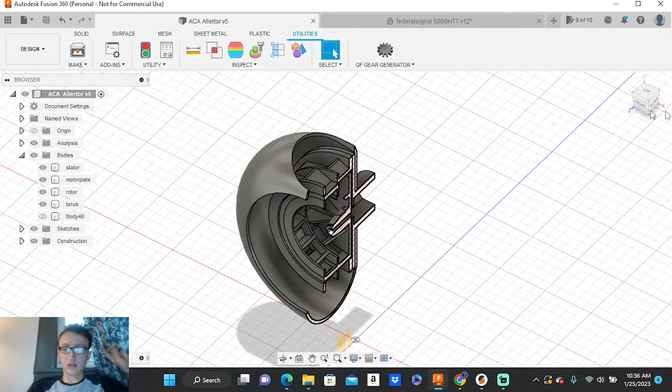I wanted to talk about a little bit of the stuff we'll be doing today, and this is going to be my first introduction into the first ACA siren I've actually ever worked on. I wanted to jump in with something a bit more interesting in ACA's lineup, starting with one of the classic ones, really the first siren that defined ACA, or in this case Biersack and Niedermeyer, one of the defining sirens that really made that company.

So, of course, we're doing a classic one here, working on an Allertor. This specifically is going to be an Allertor 125, one of the ones that has the elongated horn, not so much the cheaper versions where the horn is a lot more shortened.

But kind of like the mid-generation ACA, one of the mid-generation Allertors. This, of course, is going to be 912. I know there's a lot of different port combinations you could get with the Allertor, but I like a 912. I like the way 912 sounds.

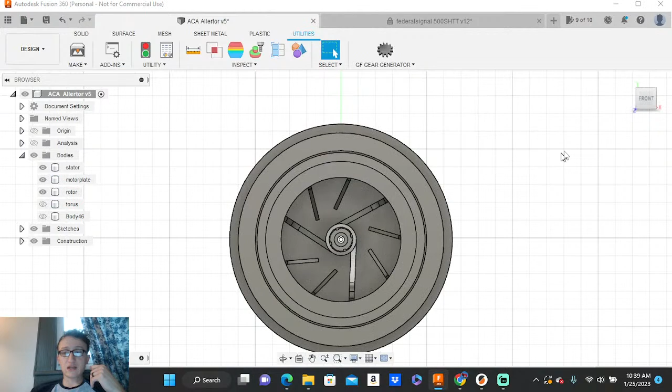Also another thing that I really liked about doing some of the designing and the stuff is the ACA rotors. The ACA rotors and stators are, let me tell you, I consider myself a Federal fan.

I like pretty much all of Federal's stuff, spanning from Federal Electric all the way up into modern Federal Signal stuff. But man, some of the really early Federal rotors are really lazy. I mean, of course, we can take a look here. This is, of course, a 912 rotor for a 500, and it is just a really simple rotor.

It is really simple, and I know kind of what they were going for with this design, trying to make the rotor unidirectional so it doesn't matter if it's reverse wired. I know that was one of the big things with them. But in doing that, you really sacrificed a lot.

Sacrificed a lot, because it's just not a very efficient rotor design. It's horrible. And of course there's a big stigma about dual tone sirens, that they're usually nowhere near as loud as single tone sirens, which is true. I think a lot of that mentality is coming from the effect of Federal design rotors, or Federal Signal's dual tone sirens.

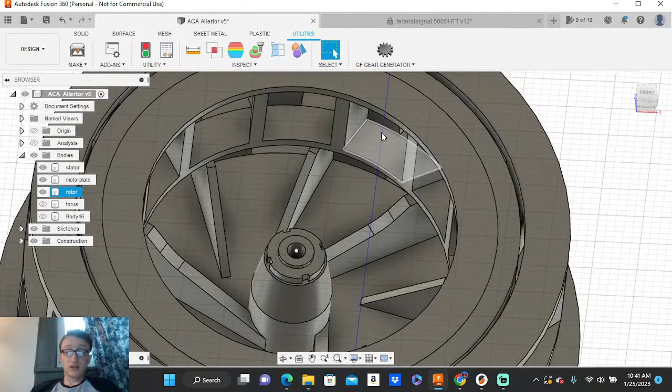Hats off to ACA, or BNN specifically I guess if you want to get more pedantic about it, who really designed the rotor. But it is just a fantastic design. It's super simple, but it is a directional rotor, so you can get some inherent efficiency gains by making it directional. And with all these swept vanes, it drastically increases the efficiency with a lot less drag on the rotor itself. And then having the knife edge sharpened ports is just...

I'm kind of nerding out about it just because of how well it's designed, because I've actually printed this rotor. I've printed both of these. So let me go ahead and go to Streamlabs really quickly again and make my stuff really big.

Let me read some of the chat. Mini Siren says, I made a video. Oh cool, I'll have to take a look at it. CNY Siren Boy says he's waiting for his SD10 and 2 poles, that should be okay. Oh, you're CNY Siren Boy, okay, I recognized the location when I was shipping them out. You should be getting it sometime this week since I shipped them Monday. Silent 65 Gaming says this is their favorite siren I'm creating currently. Awesome, yeah it's a pretty cool one, a classic. Someone asked to see the fully completed and working Songs Model 120. I have, you've probably seen the video I did, it's a bit further back in my channel, but that's at least the prototype. Eden actually has my prototype right now, it was too big to bring to South Carolina, but if you want to see it I can show you the model on Fusion. Model L says nice.

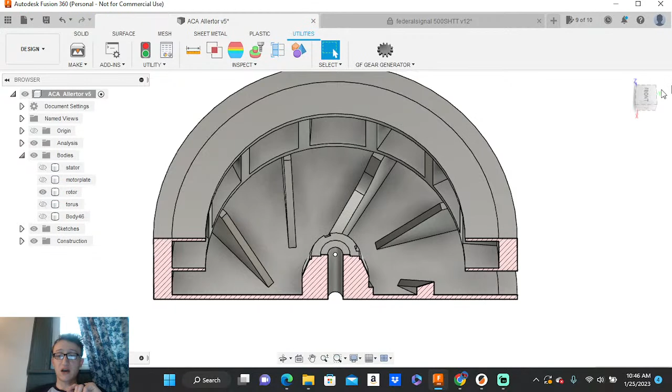I don't know how well you can see this in the background, but the fin that reaches all the way into the center and touches the hub, on the real one has a bit of a sweep to it as it goes up, flaring out towards the edge of the rotor. Trying to make that was more of a hassle than I expected. But other than that, this was really not that hard to model, so that's why I'm not going over it, since this is the stuff that really consumes a lot of time.

And the stator is much of the same thing, really not that difficult either. So there's that, but let's get on to some of the other stuff. We're going to assemble all of this. I've already gone ahead and made the rough general shape of what we're going towards for the Allertor.

There's a couple of engineering concerns here about how this is really going to work, because remember, this is going to be 3D printed, and 3D printing has its limitations on what it can do, and what it can do well, I should say. One of those things is 3D printing is typically pretty bad about making these rounded-over, spherical or spheroid kind of shapes.

In this case, it's a torus that I basically made as a toroid, then made another toroid inside that to cut it out and make this hollow donut shape. You could do that in Fusion, I'll probably explain that in some other video. But the printer has a very, very hard time trying to model this kind of rounded-over shape.

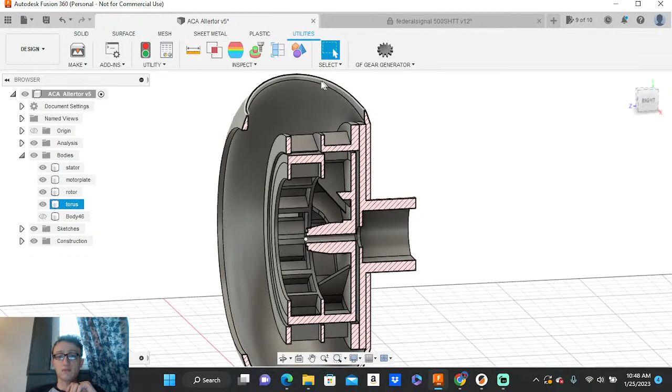It also has an even harder time trying to make this little circular cutout on the top, cut out right here, because consider this: the printer is essentially going to be printing this whole thing like this. So the bottom of the print bed is going to be right here, and it has to try to print this really slight overhang almost the whole way up, and then do it again at the top, all while trying to make this as circular as possible.

It just really can't do it, not with the kind of layer heights you have. So here's that same exact piece actually in Prusa, in the slicing program I use, and you can see these kind of printing artifacts right here.

Ooh, I'm flipping all over the place. You can see what I'm talking about right there, with this printing artifact right here, which doesn't look that bad on the slicing program, but trust me, once it's actually printed, this whole little shape really gets amplified by the real world inefficiency, or the real world looseness of the printer, the run out, one could say, because the printer is not going to print super precise. It can get pretty good, but that's about the limitations of what it can do.

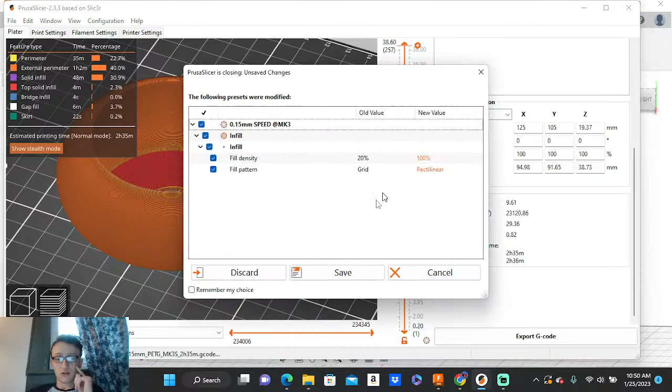Now, I did kind of negate one other thing that is kind of crucial for the Allertor 125. Yes, discard that.

So that's one thing to kind of consider. Now, on my version so far, I didn't do that, so this is not cut out like that. So this is probably going to be more akin to one of the later Allertors, which I didn't really want to go for. But I'm already printing the piece out, so there's kind of no point in going back. So this would actually be a bit more accurate to... what the heck is that?

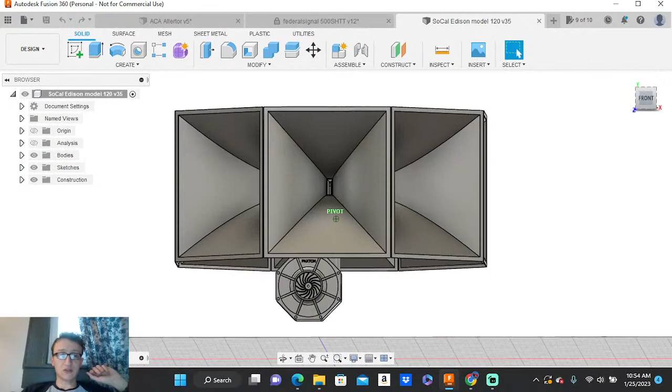But anyway, Adam Sturgeon was curious about the 120, so we'll go ahead and show that off really quick, because I never did get a chance to actually cut away at it. So we'll go ahead and open up the 120 right now. This is just the prototype version of it, kind of left in limbo, as I never actually finished it. I didn't build the frame around it or anything like that. But this is the 120 - this is what that design was based off of.

So everything is here, I think I've got multiple analysis points, actually. Okay, so that's a split view of it - that's our first split view. So this is, of course, all the horns, there's the waveguides right here, which I think I can actually probably isolate.

Oh, this is one of my old models where I didn't label anything. I was so horrible back then.

But for those who wanted to see a cutaway, a top split cutaway of it, to show what's going on - here we're looking down one of the throats of the horns. As you come down, you reach where the fiberglass horns meet the cast aluminum waveguides that come off the stator. This is what that profile looks like.

Right here is what I would consider a resonance trap. This inclined profile is there to prevent the sound wave, as it travels down the throat of the horn and the waveguide, from sitting here and bouncing back and forth, because this small profile is pretty parallel to itself - it's not yet in that horn profile shape.

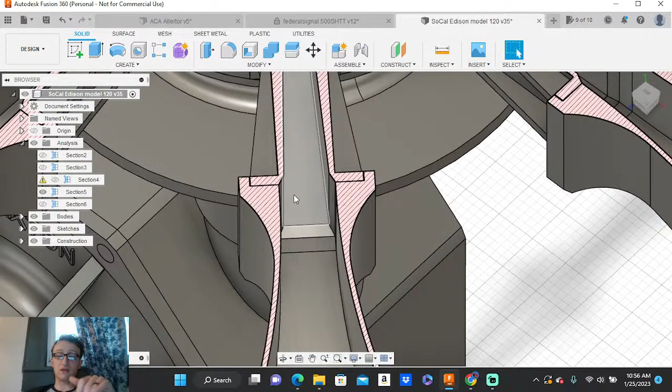So it runs a risk of some of the sound feeding back into the actual rotor and stator itself, which cuts down on efficiency. By putting this here, you're essentially convincing the sound to move more out towards the horn direction, and it doesn't allow the sound to travel back up the waveguide. That's what that weird profile is for - it's a resonance trap.

And then as we go inside, this is where we're getting to the walls of the stator. If I was to come in here and remove one of these waveguides - so this is this waveguide - there's the walls of the stator itself as we get closer up into it.

And right here, this is the rotor. You can see how it would spin around - let me rotate this really quick. Yeah, there's the rotor, rotating around this axis. This is a 4-port rotor, which is somewhat inaccurate - it would have actually been a 5-port for the final versions. But this is the 4-port rotor I've got just spinning around here.

If I had the 5-port rotor, this would make more sense. I had mentioned in a comment about an asymmetrical port ratio, where the rotor has either fewer or an odd number of ports relative to the stator, and how that can affect the tone created by the siren.

It's usually always going to be stator dominant - so if it's an 8-port stator, it's going to sound generally like an 8-port. But one of the reasons why the San Onofre nuclear generating station siren has such an interesting tone is because it actually somewhat acts like a tritone siren, where it acts like it has 3 tones.

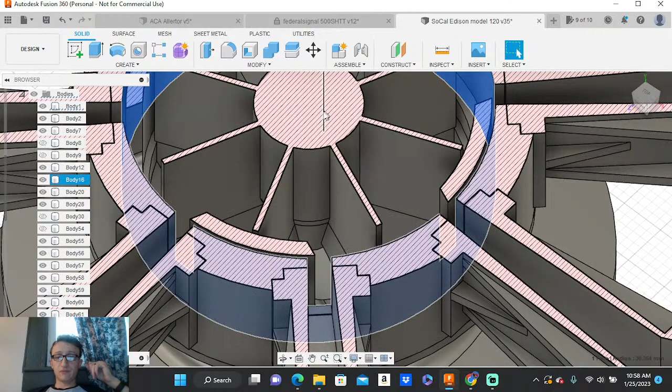But then on the inside, past that stator, past the rotor, there's actually this deflector that's in there. Let's see if I can get a better view of it. This deflector is - oh, that's a cutaway of the blower, I don't want to see that. Let me see a cutaway of the - come on, damn it, hold on, give me one sec.

Let me do a different section analysis really quick. There we go, that's pretty good.

So as I was saying, here's a bit of a different view. If you can follow along with me, I'll explain some of the oddities of it. Here's the outside, the stator right here. Of course we have the rotor, it spins on the inside, and then this is that deflector I was talking about - deflector, diffuser, whatever you want to call it.

I'd consider it more of a deflector because, if you look at the air path, it's taking air directly from the blower. Air gets pulled in here, flung out by this impeller, gets pumped up this pipe into another resonance trap, which is there to prevent the intake noise of the rotor from traveling back down into the blower and being heard out the front. It would also cause vibration issues if a really low frequency gets fed back into the blower - which is another reason why this thing has that specific shape.

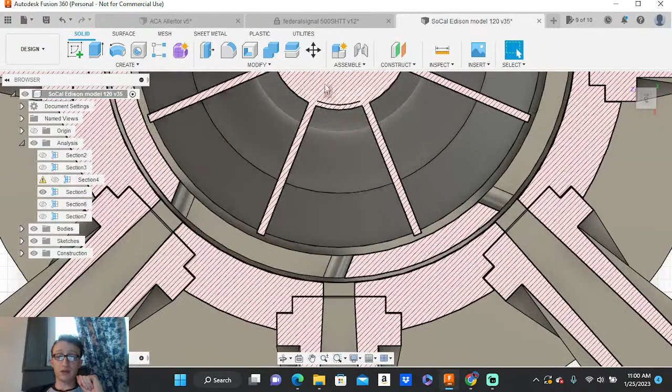You can see how there's actually walls to it. So there's walls on either side, basically to separate each port. You can see that here's the port right here, and there's a wall on this side and a wall on this side. So the only way for the air to travel out is the air is pressurized in this area.

of this diffuser, and as this port rotates around, and this rotor rotates around and uncovers this port, all of that pressure that's built up in here can then be forced out.

But the reason why I said that this is more of a tritone siren is because you've got 8 ports out here, and these walls chop the air as well.

As this rotor is spinning around, you can see that it's uncovering this little section right here of the wall, allowing some of the air to actually bleed from this edge around the port and into this side, and vice versa. So this basically, the air is being chopped against here, and then it's being chopped against the actual port.

So it's more like having an 8-port, a 16-port, and a 5-port because of just the way that the siren is set up, because of all of the stuff that's inside the siren. You're not talking about just the ports that are on the rotor and the ports that are on the stator, because there's basically this diffuser in the center.

So that's mainly one of the reasons why the 120 has such a very, very odd kind of tone to it, is because it sounds like a 16-port, and if you hear in the video of the prototype, you can actually hear that like 16-port kind of whine it has to it, where it's really high pitched.

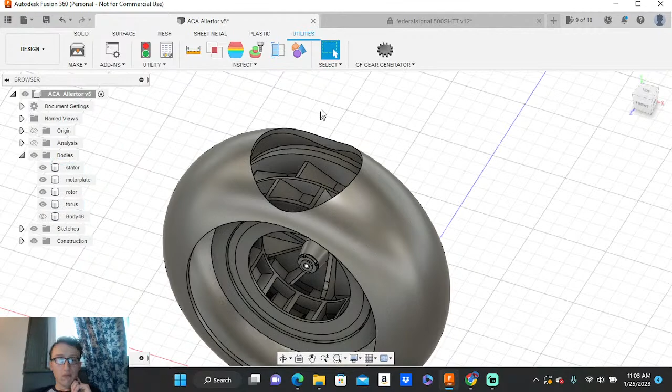But let's see if we can model kind of like the front projector, like the first little horn that's kind of on there, this one right here. The intake projector. Let's see if we can kind of do some of that.

So I'm going to start off by first coming in here, doing an offset plane really quick, and just kind of filling in this gigantic front space, because we do not need to have all of this hole right here.

So let's go up. What size is that? It's like 11? No. 12? Wow, these cop cars are really, really fantastic to listen to all day.

Let's do about 11 point... Oh, no. Oh, gotta ease it on up close to it. Let's see, does that get us close enough? Maybe not. That looks pretty good. Alright, so we'll do that to kind of close this in a little bit.

So we're going to put the offset plane there. I think the way that, just for ease of printing, I'm going to leave this part generally open on the front, but I'm going to make this part that's going to close it up basically be a separate piece.

So let's go in here. I'm not going to go... Oh, that's not centered. I'm not going to make this go all the way to the other edge.

Let me make sure I get rid of all that stuff, because I kind of want to have a little bit of space for expansion here.

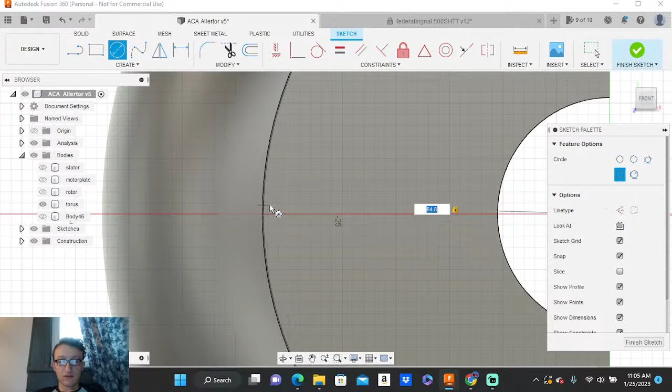So how big is that? That's about probably 35, maybe 60 - oh, that's pretty big. 65 probably, yeah about 65. So instead of doing 65, which would bring us right to that one edge, I'm probably going to go about 64.8, which gives us about 0.2 millimeters of tolerance, which is generally about how tight I make my tolerance on my sirens anyway. So let's go ahead and do that.

And we'll just kind of fill in this little space, just to essentially blank off the front of the Allertor itself.

What is my cat doing? Spice! Sorry, my cats are messing around.

So let's kind of bring this up a little bit, a little closer, there we go. So about 1.56-ish, that's close. She just sneezed - I don't know if you're able to hear my cat or not. But let's go ahead and kind of bring that out a little bit.

So we're going to make this a new body. We don't want this thing associated with this whole donut shape. So now we essentially have like a sealed little Allertor donut face thing. This hole in the back, of course, is to basically allow the entire stator section to pop through the back of the siren. So essentially this whole thing will be printed as one big piece, which you've seen in the intro of the video where I was showing off the Prusa slicing program I use. That's where that was.

Hold on, let me get this video light charged because it's getting darker outside. We're in the middle of a thunderstorm right now - no thunder yet, but a thunderstorm.

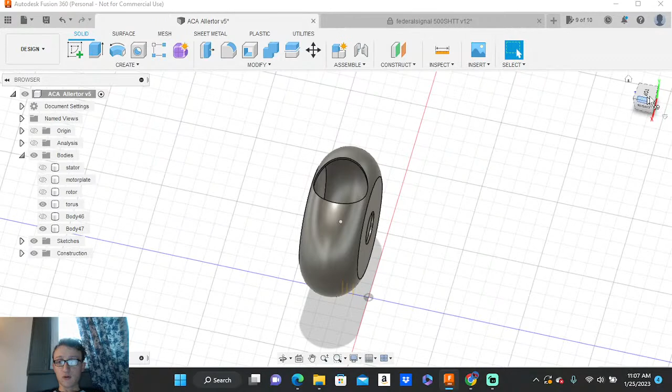So now that I can generally see kind of where we're at shape-wise, let me look at their reference image really quick. Man, yeah, I'm gonna have to make that cut out. So I printed this piece for nothing because I'm gonna have to get rid of it. It'll basically be scrap.

What in the hell is going on in this? Wendy's? Okay, y'all in the community are wild, and man, that is some wacky stuff. A Wendy's Thunderbolt 1003.

Okay, let me see, there we go. That's a really, really crisp reference image. Whoever posted this to the Air Raid Sirens wiki, that's a fantastic picture of the Thunderbolt - hats off to you, there's a great picture of it. My gosh, you can almost reach out and touch it.

Okay, so let's go with this image as our reference image. So this horn I can see from the edges of the actual torus, the toroid - this horn is about the same size. So we're going to use that as our justification here.

So first let's cut out the shape right here. Let's first cut out the hole for the intake, for obvious reasons, because we need to be able to get air into the siren. I think the center of this is about 35 millimeters, something like that. Let's do 35 and see where it gets us. So let's cut out the center hole really quick. Oh perfect, oh sweet, okay that's fantastic.

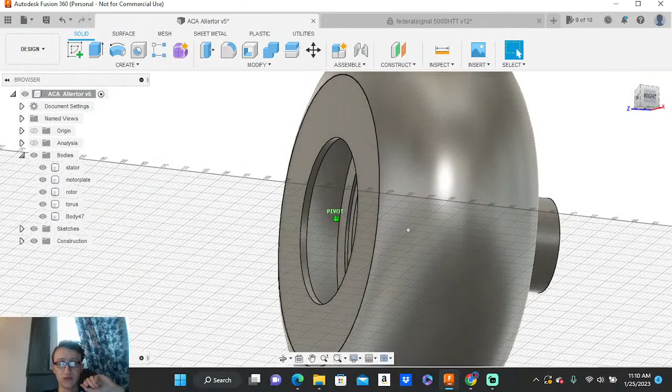So now we can kind of move on and see how we're going to make this horn actually fit in there. And this is going to be one of the fun parts, where we're going to be using the form tool, which I don't think many people have seen.

We're going to be using the form tool to create that swept horn shape. Alternatively, you can use lofts. Lofts are usually the way I do things when making horn shapes, but everyone's different. I guess we'll start with the loft tool and see where we end up. If we like that, great; if not, we can switch to the form tool and make our own custom horn shape.

So let's go ahead and name this the intake plate, just like that, and we will try to create this.

I'm going to go with the loft tool for some of this stuff. If you've seen my previous how-tos on Fusion, you've seen the loft tool used quite a bit. It's one of my favorite shortcuts for making stuff. We're going to use it here, see how it works, and go from there.

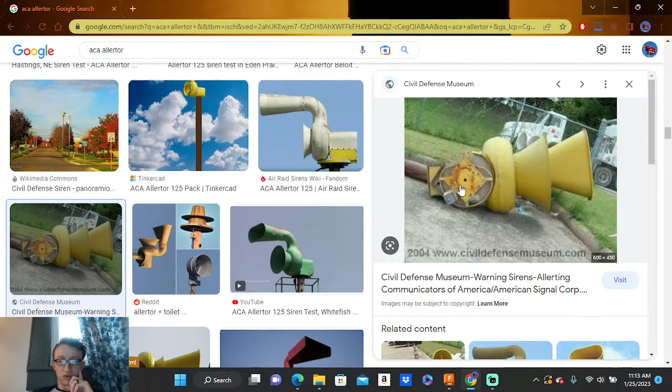2nd gen has a circular rotator and 3rd gen has a teardrop rotator. Okay, so that probably means... I mean, they all kind of have a teardrop rotator, don't they? Because they're all chain driven and the little sprocket always comes out the back. This is one of the weird ones. Yeah, that's the round rotator you're talking about.

I'm probably not going to try to make this one, because it's just so ugly looking in my opinion. I don't like the stubby little horn on the intake, and I don't like the way it leans back on the rotator. I don't know, so I'm gonna be making that one, the first one I showed you, wherever I put it now, it's a really good profile. I'm basically going to try to make this one that you see right here.

Whichever generation that one is, again, because I'm not entirely sure, which is kind of embarrassing that I don't know. I don't really mess around with ACA stuff too much, which is why I'm thoroughly impressed with how well this thing sounds so far. So whatever generation this one is.

Silent 65 Gaming, yeah, I don't like that one. The intake is weird, yeah, I don't know, it's really ugly and stubby. So this is kind of what I'm going to. Yeah, pretty sure that's Gen 2, that's what I thought, I'm pretty sure this is Gen 2.

I know the Gen 1s are more akin to the B&N, the Mobil Directos. I mean, B&N, ACA, it's the same company really, but you know what I mean. So I'm pretty certain the more of the B&N, that's pretty much like the first gen Allertors, but anyway, this is kind of what I'm going for, for anyone watching this later once the stream is up on YouTube.

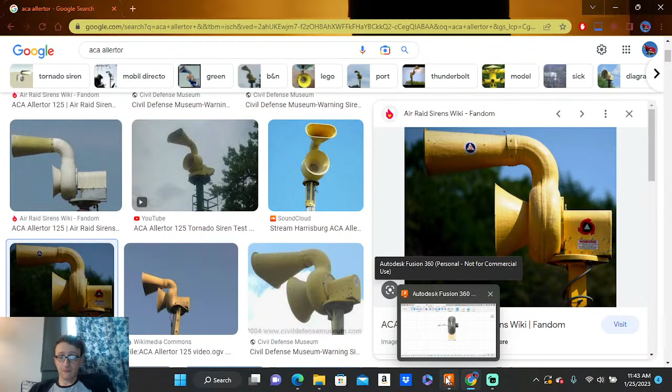40 looks pretty good, so we're going to do about 40 millimeters, because I don't want to make it stubby like this ugly thing. So we're going to go with this - this is where having these pictures side by side gets really convenient, because I can just do this. There it is, shrink that down. Oh, you bastard, I want to see the picture - let me zoom in the picture. No, I don't want to Google search it. Thank you.

Okay, well I could have gone here. This is the one that's got all the... I really don't like using the Air Raid Siren Wiki, because the information on here isn't always clear.

Okay, so the one I'm designing right now is going to be a Type 3, the later version. The Type 2s are just so ugly, and there's a Type 1. So we're going to go with the Type 3, the later version, because I personally think the last generation of the Allertors just looks the best, so we'll go off of that.

So I wish I could get that picture bigger. Wow, that's perfect. That is perfect. Okay, so now we can get this a bit more accurate here. Let's see if I can move this. Can I move you over a little? Thank you.

Okay, so we're going to kind of eyeball it a little bit here, try to get the shape to look just right. I'm probably going to go about 45. 45 looks a bit better, being just a bit more elongated.

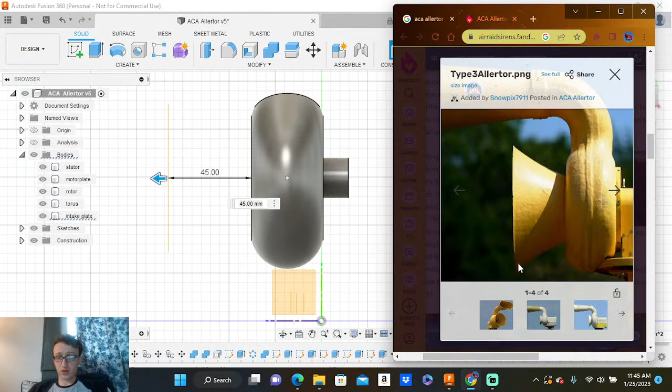And on this generation, the third generation, it looks like the actual edge of the projector is slightly larger than that of the toroid itself. So we'll have to keep that in mind. If this is going to be, I know this toroid is about 100 millimeters in diameter.

So let's go ahead and make this other circle over here. Leave that construction plane, that's a perfect place to put that. That's a bit of a... I don't know why I fumbled over those words. Let's go ahead and make this...

Horn. So we're going to come here, find the center of this circle. So this should be about 100. I guess it's 95, I was close. 95 millimeters is the diameter of that toroid.

So we're going to go out just a little bit more. The projector is slightly larger than the toroid, so we're going to go maybe about 100 millimeters, maybe 105, and just see how that looks. That's about right there. Let's see how that looks relative to the...

Yeah, that kind of makes sense, because the center hole, the intake hole of the horn, is kind of small. So let's do that. That looks pretty good. I like that. Yeah, I like that design a little bit. We're going to go with that.

Shrink that, make that go away again. Thank you, no, I don't want... No! Thank you. Fusion can fight me sometimes. I'm just a little rusty, it's been a while since I've actually gone back and made a new design, so just bear in mind, that's probably why I'm a little frazzled when it comes to getting stuff designed.

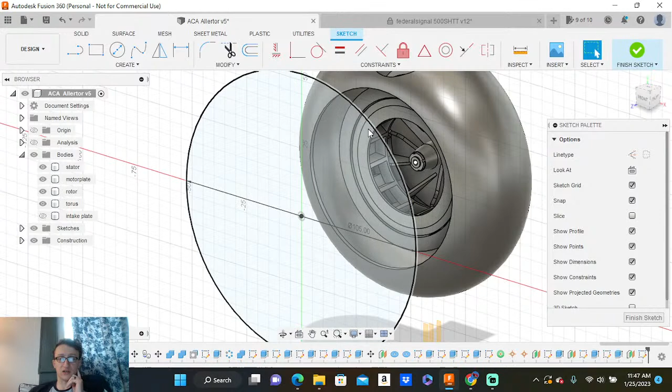Like, for example, the Model 7s are all printed in bulk. I try to print them in bulk at least, still part by part, but I can print the parts in bulk.

So let's go ahead and think of something we can do here. I might actually put another construction plane right there. I want to finish that sketch. That sketch is fine, leave that there. Let's put another construction plane right... why not, right there, let's do it right there.

Let me make this one invisible, make this one go away please. Which one is it, is it this bottom one? No, no it's not, I just placed that one. Center point, center point, center point. Oh, it's not a plane, it's a sketch, it's a sketch. Idiot.

There we go, let's make that go away so I can see what I'm doing. Okay, so we'll go ahead and go here.

I'm going to make this circle about the same diameter as the rotor itself. About 40-ish millimeters looks pretty good. Let's do 40 mils, because I know the center of the rotor, this inner edge of the rotor, is like 35. I typically make all of my rotors generally about the same size to keep the scale about the same.

But this is kind of its own new model, so things might be a little skewed. So let's go with 45 - I think that's what I made it. I think it's 45, right? So we've got this one here.

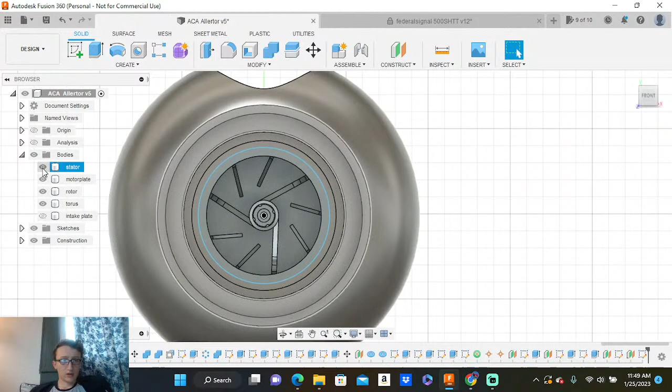Let's get rid of the stator, this motor plate and the rotor and the torus itself, so I have just the sketches. I'm going to bring that other sketch back, which I just got rid of.

This will kind of give us the shape of the horn. Now that I have these two sketches, I'm going to make a loft between the two of them, and do a tangent, or base the whole thing off of takeoff weight. I'm going to connect the two of those, and it's going to make a really goofy kind of looking horn at first that's got no weight to it.

I'm going to define this by direction, and then I can actually change how much this shape kind of sweeps. Let's see what that looks like.

My watch is telling me to move. It's like a reminder to move. I'm like, yeah, I'll look at that. I'll do that in a little bit.

So that's kind of getting there. That's already kind of getting there. That was a lot easier than I thought it was going to be, actually.

So let's go back and actually change this size. I should be able to edit that sketch. Let's change this - so what's the sketch dimension?

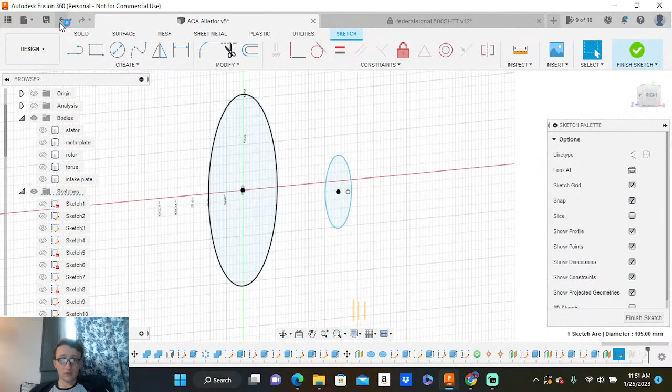So let me go back and actually get rid of that, because it was at the perfect distance. It was at the... what the hell is going on? Excuse me, yeah, it was at the right distance, but I kind of want to change that size. It's a little big.

So we'll go back, make this about 100. We're not going to do 105 - that was way too big, it just didn't look right. So let's do about 100, and we'll finish that sketch there. We'll leave it at 100 instead.

Let's go back in and get rid of this stuff. We'll keep the rotor, but get rid of all the rest. Now I can come back in, do another construction plane, so it'll separate these two, so these parts aren't just kind of glued to each other, which is not really what I want to happen.

So I can get this dimension correct, go into the sketch, and make this outer sketch go away. Okay, go into here - what did I make this? 40, I think is what I did.

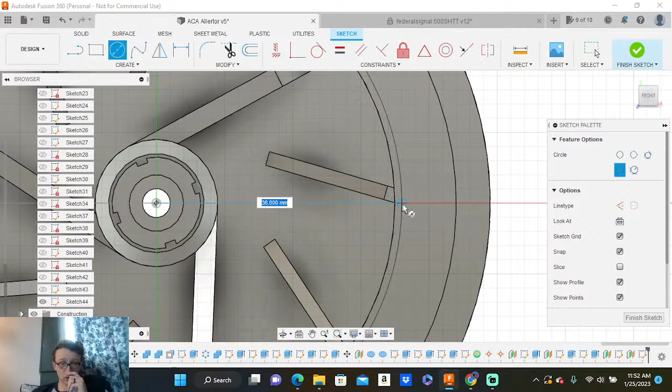About 40 mils. If I do 38, because this whole thing is about 36, I think - yeah, 36 from the inner edge of the rotor. So let's do 30. Screw it, let's do 38.

So I can make the walls of this thing 2 millimeters, like I was saying. Okay, so 38 - make this, and then we can get rid of this rotor, make the rotor go away, and bring back that sketch that I had made for the front of the projector, and we'll do what I had just done before - go back and do this loft tool again.

Between the two of those, we're going to weight the bottom one, and that takeoff weight is a little too much. I want that to be a bit smoother.

This end of this profile you're not actually going to see because it's going to be hidden inside the actual donut, the kind of donut shape. So we're going to leave that, and we're going to kind of cross-check it here by bringing that back and seeing if that looks better.

And I think it does - I think that looks a lot better. That's pretty accurate to the... yeah, I think that's pretty accurate to the right shape. So we're going to call that good.

Now, granted, that is going to bring that all the way to the edge of the rotor, which is not something I particularly wanted to do. So I might actually have to do a cut to get this off of the rotor, because it's a little close for comfort.

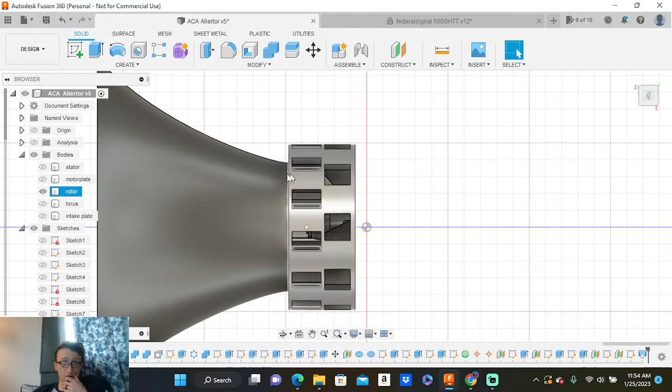So let's get rid of the torus really quick, because you can see that it's right up against that rotor. It's really close. So I'm going to come in here, get rid of this rotor again as well. Oh, you moron. Why did you bind it to the rotor?

Okay, let's try this again. Let me come in here. I'm going to construct a new offset plane off of this sketch.

Let's go in about... 5 mils is a little too much. Let's do about a millimeter. Screw it, let's do 2 millimeters, just to give us enough, a bit of room off of that.

It should match up kind of close with the stator. I want the inner cone to sit up against the stator, like it does in the real one. So let's do about 2 mils in from that.

It's still a little far. Let's do 1. Wow, it's still pretty far. I'm gonna say 1. We're gonna leave it at 1, just to give us a bit more space off of the stator, and definitely a bit more space off of the rotor.

So let's go back and do this sketch again, same dimension as this, so 38. Finish that sketch. Now can I make that sketch go away, the one I don't want anymore, the one behind it? It's that one, right? Yes. No. That one? There we go.

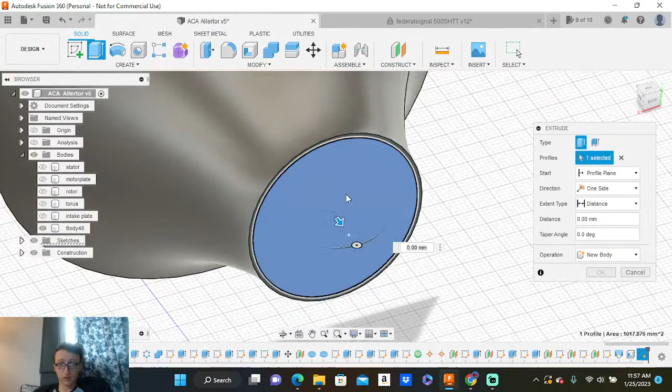Okay, so 38, so we'll do 36, which will give us our proper thickness. Go in here, and that new sketch I just made, we'll use that to cut. We can cut out that to make the horn projector actually have the right profile to it now.

And where is that intake plate? There's the intake plate. So the intake plate kind of cuts in a little bit.

Now if I really wanted to, when I made this profile, I could have actually hit cut and it would have automatically cut this little section out to make these two kind of match. But it ultimately doesn't matter.

So I'm going to go in here and actually sketch off of that, just so I can cut this circle out a bit. So I do need to see where it's actually making contact. Where is it contacting at? About right there, 42, that makes sense.

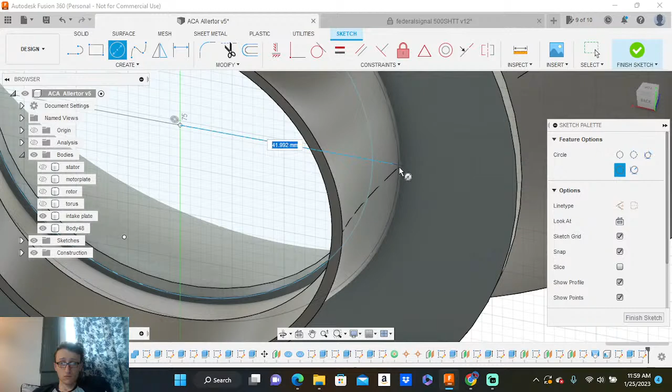The two are contacting. I don't know why it has that funky little shape on it, but we're gonna roll with that. I'm gonna cut it right there, and we're gonna cut this part of the ring out so there shouldn't be any interference with the two of them.

Now how does that look once we actually have that whole thing on there? And that little bit will kind of extend in a little bit, and we'll get really close to the rotor, just like that.

So I think the whole functional part is just about done. Now there is one more thing we have to do, and that is I want there to be another plate that will cover up the front of the rotor itself. Let me check the diameter of this stator really quick. The diameter is 60 millimeters, so it's got to be at least 60 millimeters.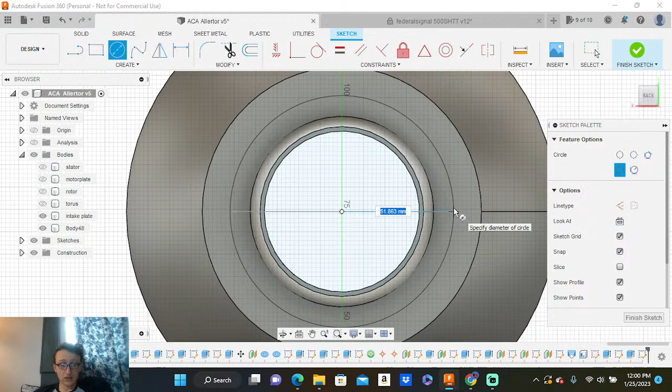Let's get rid of the stator, get rid of all that stuff. So now I'm going to do another sketch off of this. We're going to make this 60 millimeters, so we'll cover up that face, cover up the front of the stator.

Okay, so now how much room do I have? I don't think I have a lot of room. No, I don't. Okay, well then let's press pull that then. Press pull on two sides. Let's see if this might freak out Fusion — this might really freak out Fusion. I don't want it to cut, I want it to join.

Okay, there's not a lot of space there. Let's get this a little closer. So that's gotta come in about half a mil for that to properly sit up against the stator. That looks pretty good. So we're gonna join that.

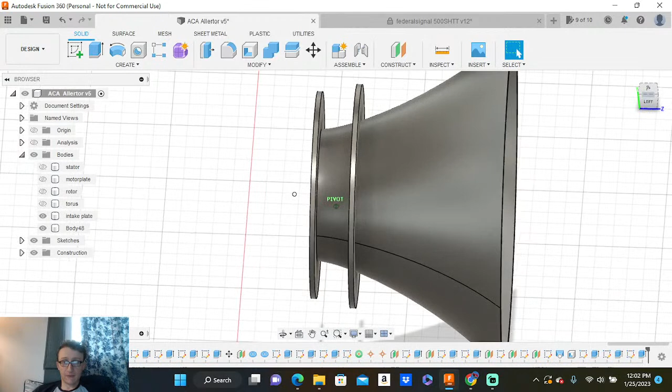All right, so now this is the kind of shape I've gotten so far. This part is going to be a real pain for printing, because I'm going to have to manually come in here and add or remove support material if I want to keep it the way it is. The good thing is you're not going to see this portion because it's going to be inside the actual housing, so it's not too big of a concern to me. But this is looking pretty good so far in terms of the general shape we're getting for the Allertor.

Now I know that front horn is very thick, but I made all these housing pieces a bit thicker than I traditionally do. Mainly because I noticed one thing when I was working on the 500s, when I was first designing those — I tried to make the housings, the shrouds and the projectors as thin as possible, because it makes them nice and flexible. Like here's the 500s housing, I could bend it and it's not a big deal because it's PETG, a pretty strong plastic.

But the one downside is that it's really, really transparent. So if I get my flashlight, you can see there's the housing right there — if I shine my light through it, you can see the light right through the housing. And it's really bad in sunlight because the whole thing is pretty transparent. So it's one of the things I'm trying to change with some of the new designs. Not that it's a bad thing, it's by no means bad, the model looks fine — it's just that when light shines from behind it, you can see basically right through the plastic. So it's something I'm considering a bit more this time.

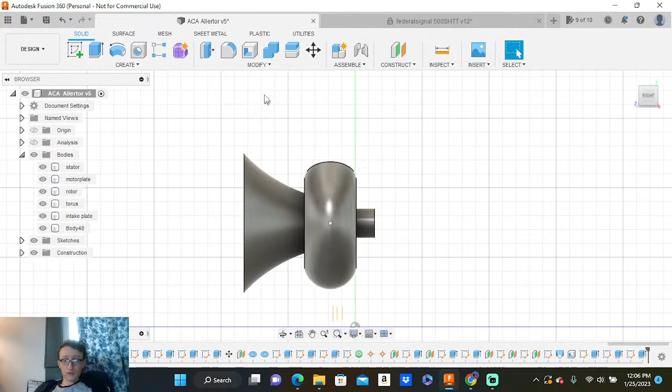So again, as one of the viewers pointed out, this is modeled after the later version of the Allertor. So that's one thing I have to consider, is I do have to make that little cutout right there at the bottom of this to actually make that fit, which I'm not super excited about because it's going to be a pain and I got to deal with doing that. But we'll figure that out.

So I guess what I'm going to try to do now is this little elbow. Of course, the picture's trying to hide it right now, but this little elbow that comes off of the actual pressure case, I guess you can call it. That little elbow, I can already tell is going to be a real headache for the printer to try to model.

I might even try to design this piece specifically to be... I don't know, I'll probably try to see if I can design this piece to be printed specifically on the MSLA printer, which I know will probably have a much easier time printing that. But let's just try it. Screw it, let's just try it. Let's see what we can do.

Let's see if we even can just do that. It's a laggy model too, there's a lot of stuff on this thing. Where is it? I want to grab that picture. Come on, I have to make it bigger. There we go.

Okay, so back to that. Let's see if we can try to make that tube that goes off the top. I think I have an idea of how to do it. I think I'm going to be doing paths in order to do that. Now, there is pipes, which is an option.

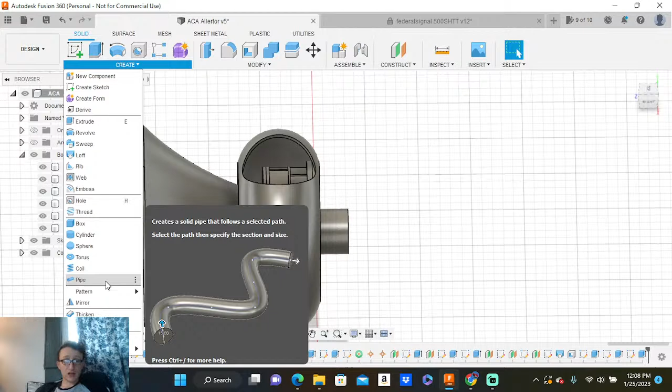Select the path, then specify the section and size. So let's see if I can make a path. This is something, this is kind of getting into some newer territory. I haven't actually done this kind of stuff before, in terms of working with paths. So we'll see if we can do this.

Torus coil pipe. How would this even work? I'm kind of curious about this actually now. Let's see, because I have the center vertex right here. Screw it, let's just try it. We're both going to be learning this together at this point, seeing what we can do.

So I have just the torus now. Intake plate, why didn't you get stuck to the... I wanted you two to get combined. Yeah, I wanted to combine you with the... Let's see if we can do this really quick. Hold on. Okay, there we go. Okay, that's much better.

Alright, I'm going to rename this to intake projector. Okay, and we'll get rid of that now. Okay, you can probably get rid of this motor plate to the back. Oh no, that's molded into it.

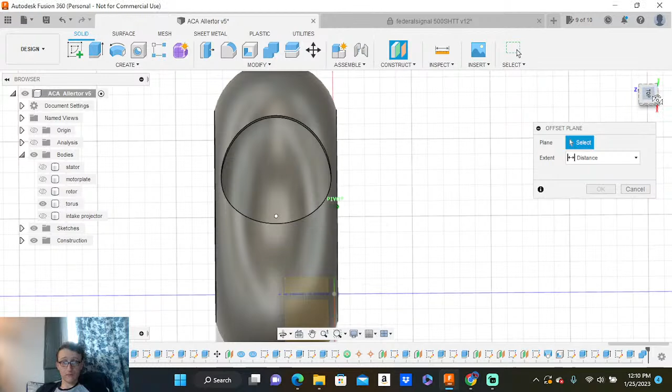Alright, so let's see if we can make the path that this thing is going to want. Let me see if I can first start off by just constructing a new plane. We're going to go through... is that centered correctly? Yes, it is. We're going to make an offset plane from there, which I know is centered. And analysis, please. Thank you.

I love the analysis tool, always makes things so much easier. So, let's see if we can make a line. Let's just start doing lines. Create a sketch, we're going to sketch off of this plane.

And we're just going to start doing some lines first. Oh, it's going to be an ass about this. I just want to select this vertex, but it's not going to want me to just select it. There we go, okay.

I really shouldn't even say vertex, it's just a point. I'm going to go up about probably right there, I'd say. Let me see the picture again. Yeah, because the sweep doesn't start for a little bit, but it does start very soon after coming up out of the bottom of that.

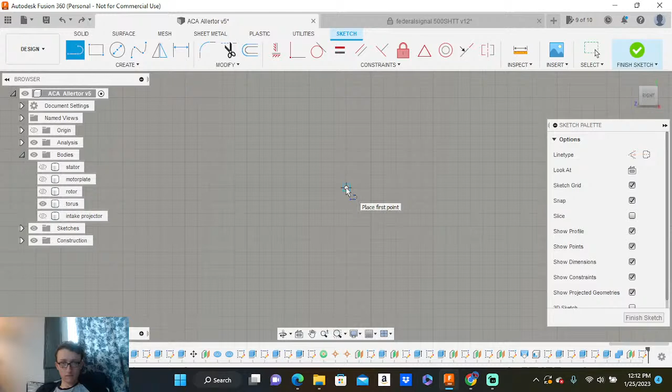Alright, now we're going to have to make an arc. Let's do a 3-point arc. So I'm going to do this.

Sorry for being kind of silent in this section, guys. I'm just trying to make sure I get this right. So I want this to work well. I think regardless of what I do, even if I print it with the MSLA printer, I'm going to have to put support material inside the tube, which is not something I'm really excited to do. But I don't really know how else I could do this.

So let's... this extends... I got 59 seconds left on this print. You're going to hear my watch go off in just a second because I'm timing when this print is done. So this is going to be, it's pretty far above that actually. It's going to be about like right there. Not about like right there maybe.

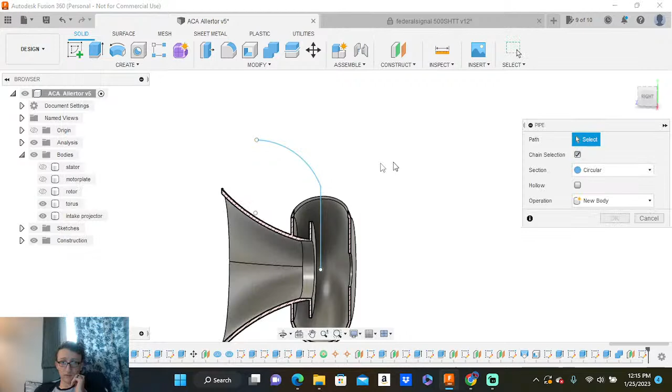Let's just select that. This pipe's gonna look real goofy. Oh, hold on, hold on. That's not... I was gonna say that's not horrible, but no, that's actually pretty bad. That looks like dog, man. That looks like dog. Okay, so let's...

It's gonna try to cut that section out. I don't want it to cut anything. I just want it to line up.

Hollow, yes, I want it to be hollow. Section thickness, not 8 millimeters, that is ridiculous. Let's do 2. Not 2.7, just 2. 2 point... yeah, there we go, 2.

Okay, let's see how this... I mean, that's close, that's really close. That's surprisingly a lot... that could have gone a lot worse. That could have gone a lot worse. That looks not too bad from what I was expecting it to do. It's by no means perfect, of course.

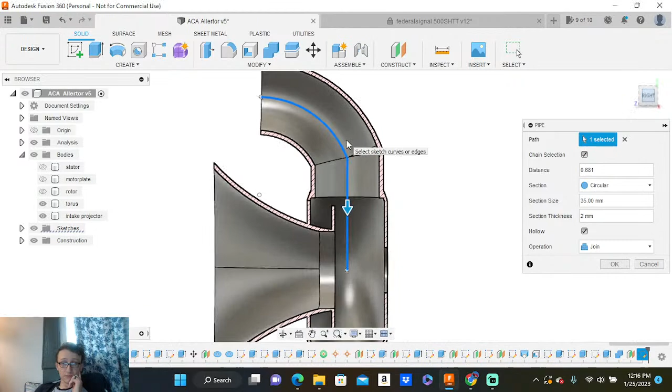Yeah, I don't like that it's got like this little bump right there. I think it's because I made this whole thing kind of like its own. I didn't define this as a specific endpoint. But that gives me hope. That gives me hope. I just gotta make that look a lot better, and I think we'll be good. I just have to work on this arc right there, make that arc better.

So let's try another arc. Conical curve, no, an arc. Okay, I can do an arc with tangency, that's kind of more my thing. So let's do, wow! Wow, that even might be better.

Yeah, let's try that. And then from here, we'll make this extend out a little bit, just like the real one does. Let's try that. Let's see how that looks. That looks a lot better already. Finish that sketch.

We'll do pipe again, circular, make it follow that, hollow it out. Again, it's too small, make this a bit larger. Whew, that's way too big. 35 is a little too big, it's going to touch the walls. Let's do 34.

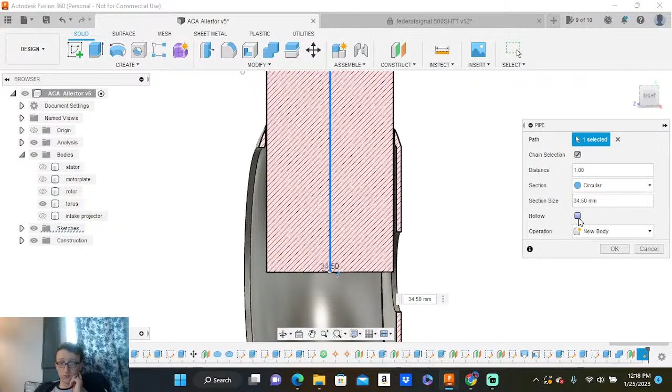Yeah, let's do that. Make the pipe hollow, obviously. Well, that's not bad. I mean, if this is... that is not bad. I thought this was going to be a lot more of a hassle to make this work.

But I like that, I got no problem. I got no problems with that. Yeah, that worked a lot better than I was thinking it was going to work. Distance, I want to change this distance a little bit because it's extending back a little far.

Let's see how that looks. Intake, that's all going to be in the way now. Yeah, it just does have that kind of goofy look to it. I guess that's just the way it's going to look. It doesn't extend nearly as far. It's probably more about like that, actually.

Yeah, that's not bad. It needs to be up higher, and the molding needs to kind of make it fit a bit better with this. But I think that's pretty good.

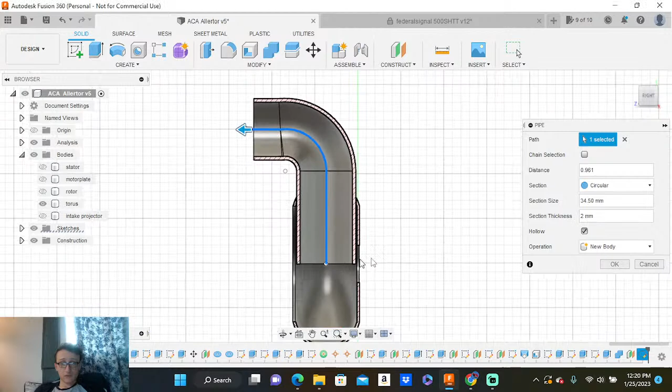Let's get rid of the projector. Let's solidify that, and I'm going to come in here and cut this back a bit, it's a little long. There we go. I don't want it to extend too far, and I don't want it to hit anything.

So there's the stator. By the nature of the stator being in there, it's going to kind of cut that off a little bit. Let's just call that the way it is right now, and we'll assemble the whole thing and see how it looks.

That's not horrible for like a first try. One thing that's important though is that the actual diameter of the pipe needs to be about the same as the intake for the rotor, because that's imperative. Diameter is 30 millimeters. I think the rotor is 35. That's really close.

Whoa, the what, length? I don't want the length, there's diameter. That's really close. 35, okay, I mean that's about a 5 millimeter reduction, but that's pretty bang on right there, I think. Yeah, I think that's pretty good.

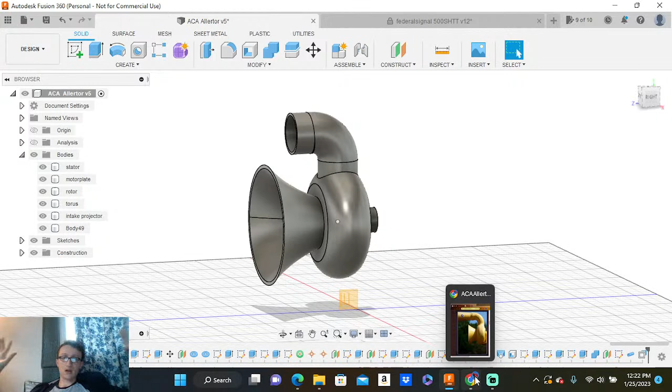And then the actual top projector is not going to be hard to model at all. That's again using the loft tool. Loft tool again does a majority of the work for you, so it's not that hard. It's all dependent on how well your sketch looks when you first do it.

So let's check, let me double check all this stuff to make sure it actually modeled it right. This should be a wall thickness of 2 millimeters, so diameter is 34.5. Diameter 34.5, distance. Okay, so yeah, there's a 2 mil wall thickness. Perfect, just wanted to make sure I actually modeled that correctly, because sometimes it doesn't.

Perfect. All right, so that's the basics of the Allertor done. At least I have to model the top projector still, but I don't know.

Let's see what else, Silent 65 Gaming, I'm back. Oh, welcome back man. Yeah, you didn't miss a lot, I went and had a very rudimentary breakfast. What I like to use is a manual of a Siren for reference. Like I have one, but I can't find it. Give me one second, okay.

I can't find the manual, but if you look up online 'ACA Allertor 125 manual,' a good manual will come up and show you all the parts of the Siren, even the inside of the timer cabinet. Well, I mean, I already know what the inside of the Siren looks like, so that part's not hard for me.

And even regardless, the inside of the actual cabinet itself, the rotator cabinet, the doghouse of the Allertor, or pretty much any of the Penetrator series Sirens, are pretty much all exactly the same in terms of how it's done. The problem is that since this is going to be a smaller version, and the size of my parts are different than the real ones, it really doesn't matter what the inside of the rotator section or slip ring section is, because I'm going to basically have to redesign all that stuff from scratch anyway in order for it to work at the scale I'm doing.

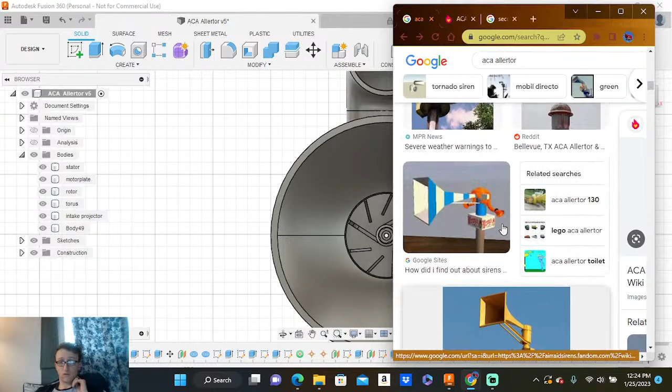But the rotor design I went off of is basically just copied off of a picture I think up here somewhere that's got a really good picture of what the rotor looks like. Again, there's that goofy Wendy's Thunderbolt, it should be on here somewhere. Anyway, it's by, I think it's specifically called the Civil Defense Museum, which is a site owned by Vanamond 2. If you guys are unfamiliar with his YouTube channel, very old YouTube channel, very old Siren YouTuber, I should say, and one of the ones that kind of got me into making modeled sirens, which if you've seen my Los Angeles Siren vlog, which I posted a while ago now, or a couple videos ago, that was, there it is.

I talked about him and how he was kind of my inspiration for my first model sirens. He was the one who really got me into it. Not by me talking to him - I never actually communicated with this gentleman, but his videos he posted were really what got me into it.

So here's civildefensemuseum.com, and of course these are some of the original reference pictures I went off of. This must be a third generation Allertor, but this is a picture of that.

Here's when it got taken down. It had a bit of rotator damage - ooh, really bad rotator damage. Actually, the whole track is all messed up. They must have just dropped it.

Interesting. But yeah, so this is kind of what I'm going off of. Wow, that's such a weird shape. I'm going to have to try to model it.

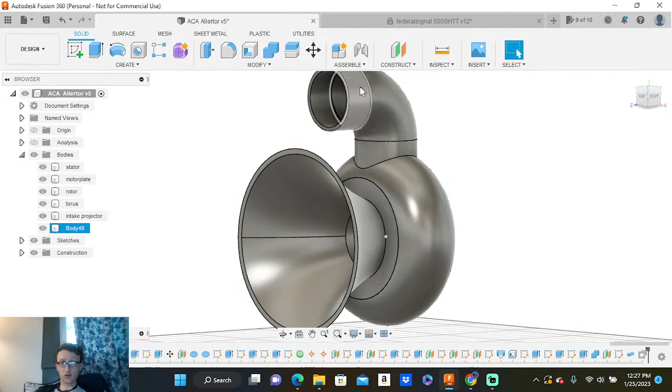The pipe right here actually just part of this donut shape instead of having it being its own external piece, because then it's going to be a piece I'll have to try to make fit on this. You know what? Let's do this.

Let's try actually making these two pieces the same thing and then seeing how it works.

So I'm going to see if I can make this a little bit bigger. Can I expand this just a touch, please? Please? No, okay, you're going to be an ass about it. Well, never mind, then I'm going to go in here instead of just doing this.

So we go over here, do a sketch, create sketch, blah blah blah blah. Can't see it now, thanks for moving it to a point I can't see. Okay, so I'm going to come in here, center circle of this.

I just need to bring it out just a little bit. Okay, so I'm going to temporarily make these pieces all one piece, which by doing that should actually join this section to the actual donut, the torus. Yeah, let's just do that. Let's join those. And I'm not going to save this portion, so I can actually just undo that.

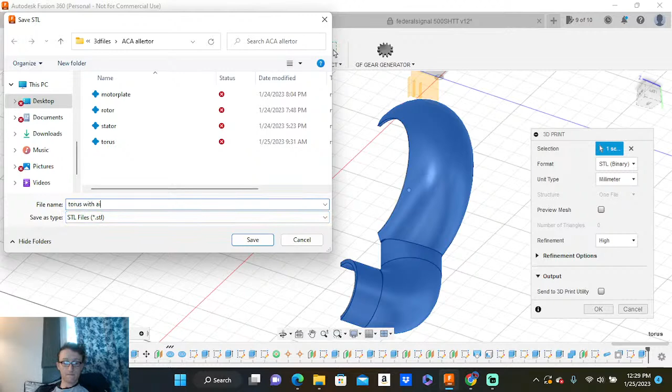Let's just see what the printer is going to try to do. Let's try with the tube on it. All right, let's try that with the pipe on it, and let's see what the slicing program wants to do with it.

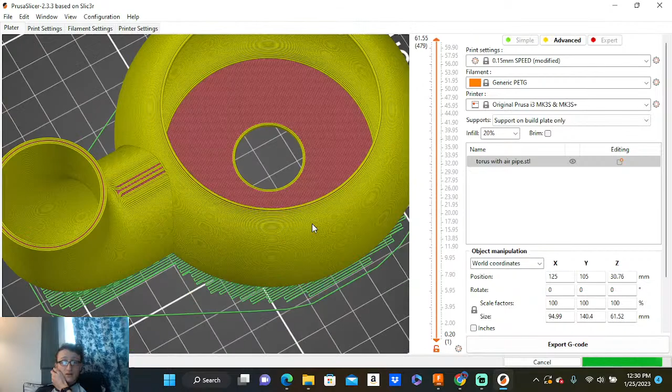Let's add a little bit of supports and then see what it does. If I can print it just the way it is, as one piece, I think I'd prefer to do that. I think I would really prefer to do just that, because it saves me so much time in the modeling process, or the manufacturing process.

Let's see, how is that? It doesn't look too bad. It doesn't look too bad if it was all printed as one piece. It also - I mean, not the modeling process, the manufacturing process.

Yeah, that overhang though, right there, that blue section, I'm gonna be printing in free air for quite a bit, so that concerns me a little bit. It does look like it bridges pretty consistently, but this is just straight up in free air.

So I might have to support that a little bit. I really don't want to, though, because I'm feeling lazy. I don't want to do that.

Okay, how long is that print going to take? I bet it's going to be about 5 hours. That's about what I was expecting, to be honest. But that's not a horrible time. By far, that's one of the longer prints for one singular piece of a model.

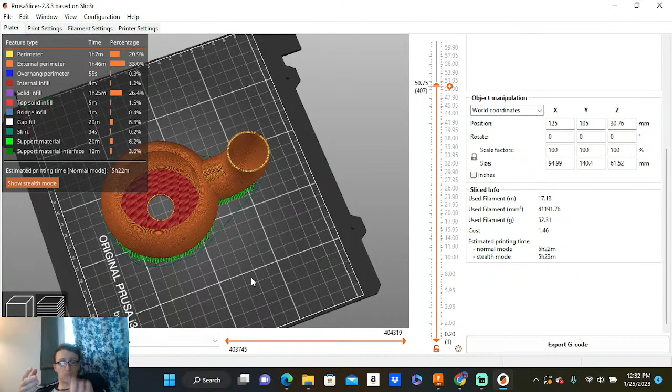I can print like 90% of the 500 SHTTs, a majority of all those parts, in like the same time, about 5 hours. So just for the housing of an Allertor, not counting the rotor, stator, the doghouse and all that kind of stuff, that's kind of a long time, which is a little concerning.

I'm also trying to keep in mind that I want these things to print within a reasonable time, so if I sell them, I can actually get them out in a reasonable quantity. With my Sirens, assembling them and getting them out is usually the hardest part. I'm trying to keep the prices down as low as I can, so people can actually afford them. There's no use making a Siren people really want if they can't afford it. So I'm trying to make the Sirens as cheap as I can, but it's a lot of time and a lot of money for parts and materials to actually make them.

It really makes me feel bad when I see people in the chat or in the YouTube comments saying, hey, I really want the Siren but I can't afford it. In my head I'm like, damn it, I really wish I could help, but I'm trying to get them as cheap as I can as it is.

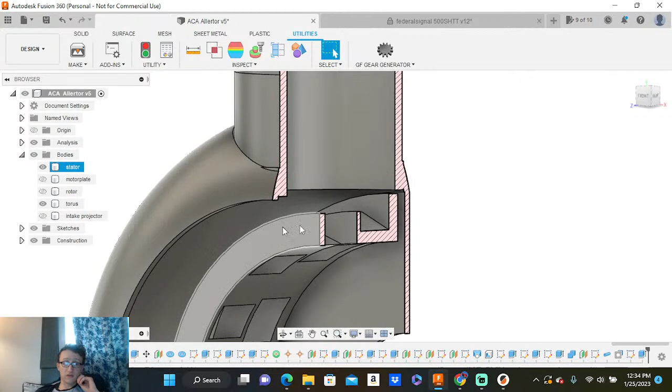Also, one thing people haven't really realized inside the Allertor, specifically the later version, is that it's not just some open space like this. When the stator is placed in there, there's actually a deflector in the modern ones, the last generation of Allertors. There's a little deflector that goes from about right here on the intake tube, or the exhaust tube, the output tube, that comes down and covers half of a section of the stator, because the stator is actually a directional stator, so the air has those knife edge shapes to it.

So I'm trying to see if I can get a better picture of it right here. Since it has that little knife edge shape, the air that comes out of it has a tendency to want to spin out of it, rather than coming equally out all the sides. So what happens is that when the air is inside of this donut shape, it tends to want to spin inside of here. The air coming out of the siren wants to spin around inside this donut, and it doesn't really want to flow up and out through the tube.

So on the later versions, there's actually a small piece that comes down. You can see it on some of the others from the outside if I can get a good enough picture. There's a video Trains and Sirens 1 did recently of an Allertor 125, the late generation, third generation, and when the siren rotates around and you're looking at it from behind, you can see that the actual donut, the toroid on the shroud, has a very slight volute shape, like a snail shell, as it comes out to the actual output pipe.

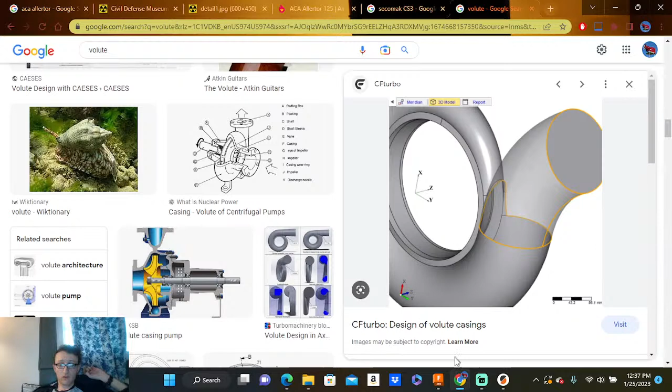Oh, you have? Because I was going to say, if you haven't, one of the ways that I've learned is, for example, let me go back to Prusa really quick, let me get rid of this. Go away. Actually, here's an even better way of illustrating it, because I got the 500 right here, let me pull up the 500.

So if you look at the 500, when you're talking about the rotors and stators - if you want to be pedantic about it, I know a lot of people are always referring to this center portion of the siren, the part that spins around and actually flings the air out, the fan, as the chopper, and this is the stator. Well, in Federal's nomenclature, you can go back - it's on one of their manuals.

I think it's for the Model 5. I think the center, this rotating section of the chopper assembly, is considered the rotor. This outer portion is the stator, as everyone knows, but those two parts are different. It's not like this is a chopper and the outside's a stator - the whole thing, the rotor and stator, is the chopper assembly. That's the chopper. So if you want to refer to it as the chopper, you're referring to both of them. If you're referring to the fan in the center, it's the rotor. If you're referring to the outside, it's the stator. But the whole thing, when they're both working together, that's the chopper.

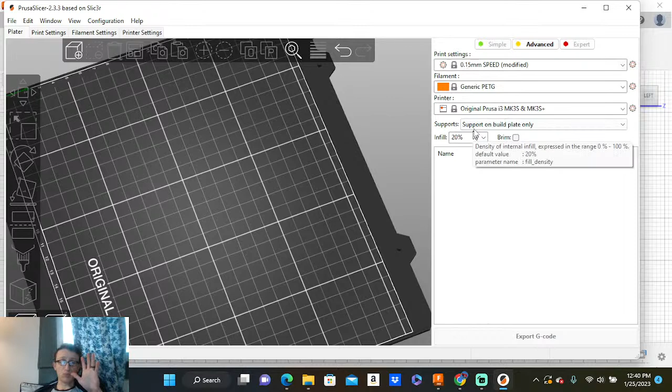But the way that I make it work is, say if my print settings are set at like 0.15, you can kind of think of that as almost like your printer's resolution. Of course, that's not completely accurate because that's dependent on how big your nozzle size is, but I like to behave that this is like a print resolution. So if I have a 0.4 millimeter nozzle, which is what I think I have, then usually if you want your sizes to work well, you have to account for the size of your nozzle.

So in this case, the outside of this, the stator, is 50.4 millimeters. I could have made it 50 millimeters, but the rotor is 50 millimeters. So if I look at the rotor, the edge of the rotor - I don't want the loop area, I want the actual diameter, please. Okay, well now it looks like I just lied to you, but the diameter of the rotor itself is 49.5 millimeters.

So say if you've got a rotor that's 50 millimeters in diameter, you can't make the stator 50 millimeters also, obviously - you know that already, you know you need to have a gap in it, you need to have tolerance. So what I typically do, at least with my printer, is that whatever the size of the rotor is, I will usually move that up by either 0.2 or sometimes up to a complete millimeter bigger in the stator.

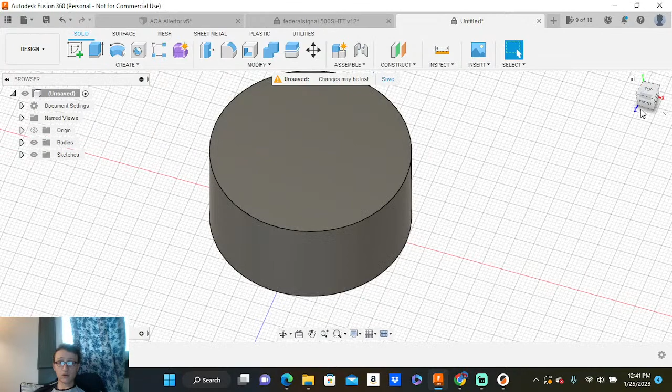Let me do something really quick to illustrate what I'm talking about. I'll knock out a stator and rotor really quick. So if I make a circle, let's say this is 50 millimeters, bring this up in size, 24, why not. This is the rotor. I'll even put a hole in the center to make it look more like a rotor.

Okay, we got our rotor right here. Now I'm going to make my stator, a little bit bigger, let's make it, I don't know, 60. Who cares. Now, I obviously can't make this stator exactly the same size as the rotor.

So the rotor I know is 50 millimeters. I know my printer's tolerance is about 0.4. So what I'm going to do is make this about 52 - that's a little big, about a 2 millimeter gap between the rotor and stator. And of course, you've worked with sirens before - the tighter the tolerance, the more efficient, the sharper the sound is.

If you have a rotor that's 50 millimeters and you're away from the walls by 10 millimeters, you're not going to be making nearly as much noise. It'll be very airy instead of a sharp beep kind of sound, because you're getting a lot of air bleeding through it rather than actually being chopped.

So in this case, this is a 50 millimeter rotor. I would bring this out about, say, 50.2 - that's a little close. Let's do about 50.5, about half a millimeter tolerance.

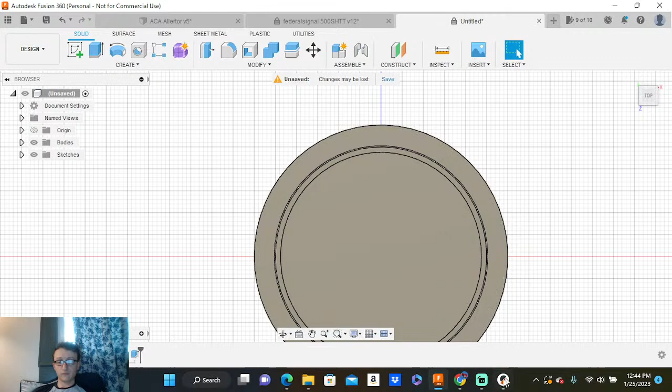I hope that helps out at least a little bit. I know that you probably already know that - you can't make it the same exact size, obviously, or else it's going to scrape like crazy.

Yeah, of course, thank you for that. It's something you kind of learn. You'll pick up on it after you've made a couple of them. You'll figure out what kind of works. A lot of it just comes down to experimentation. The only reason I can give you that number off the top of my head is because I've made so many models that don't always work, and then I've just kind of experimented.

In fact, one of the ways you can also see how tight you need to make things, depending on what program you're using for modeling your sirens, is to make yourself a tolerance gauge. It's really easy to do. I'll show you the one I made.

Let me go ahead and see if I can make my webcam a little bit bigger. Go ahead and explode myself a little bit there so you can see me just a bit better. Give myself some light - oh damn, that's bright. Hold on, sorry about that.

But make yourself a tolerance gauge. So I went out, I printed this out of resin, and literally it's just a block of holes. That's all it is - it's just a block of different holes that I believe these go up.

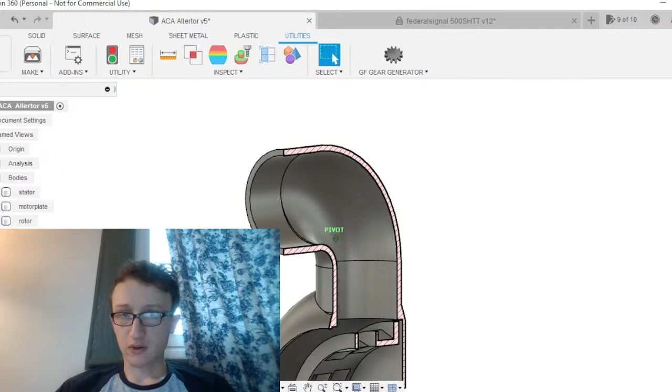We've got pretty much the hard part kind of done. I'm pretty confident the printer can handle that, so I'm going to leave that part welded together. If I need to break this little tube off later, it's not that hard to separate the two, so I'll stay right there with it.

That looks pretty good, but now I have to make this little flare. Let me get rid of the volute picture. Where is that little flare piece? Where's the little flare? Oh my god.

Okay, so I need to work on this little flare right here that flares out on the end of the tube to accept the top projector. That's not too difficult to do. Let's go in and see exactly where we're sitting at. Okay, we're kind of far back. It's pouring outside right now - you guys probably can't hear it on the mic, but it is pouring.

Let's go cut that little flare, make that just a little bit - yeah, we'll cut that flare right now. Let's make a sketch, I don't know why it wants to move me way down there every time. So let's cut this sketch. That's 34.5, let's do 36... 36.5, which will bring us out a little bit.

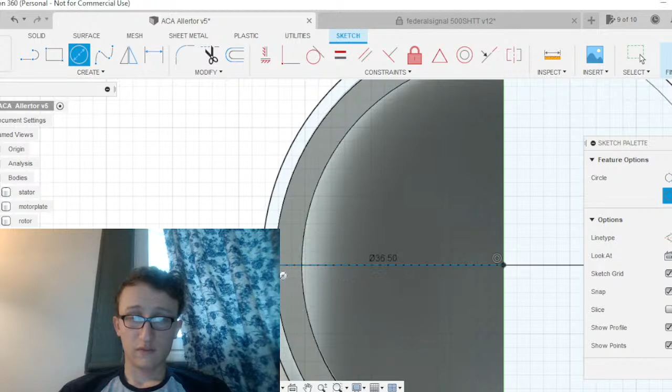Then I'm going to go back here and press pull. Actually, let's do this - let's press pull, make another circle really quick to line up with that. We'll press pull just this little outer ring, pull this back just a bit, which will give us the appearance of that little flare. We'll join those two together, and then I can go in and cut that back because I don't need all of that. I do want the flare to actually be functional.

I hate how it always zooms me way down to the bottom of the model. So, 30.5, this is going to be 32.5, because we have a 2mm wall thickness. So then, come here, press pull - press pull this back a little bit.

This is the beauty of using section analysis, because I can see exactly how far back this is getting cut. I don't want it to cut down that deep, but I'd say probably about right. Yeah, let's do 3mm. That's deep enough, I think.

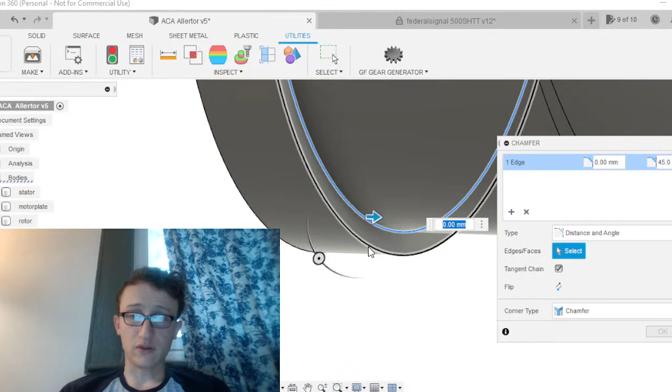Now I want to clean up this edge, because I don't like how it looks. It's very sharp, and it's also just not going to print that sharp edge very well. So what we can do is come in here and do a chamfer on this edge, just to make it look a bit neater. Yeah, that looks pretty good. Make it just a bit more elongated. Oh, don't be difficult with me, Fusion. There we go.

Okay, that looks pretty good. So we have that little tiny lip up here. It's not nearly as long as the real one. I don't really feel there's that much need to make it that long, because of course this is 3D printed, it's not being made of fiberglass.

It does kind of extend back pretty far though. We can make this a bit longer then. Let's make this a bit longer. There we go. All right, let's call that good.

I don't want to keep messing with that too much. This is just getting into detail stuff, details you can work on later. That's the way I've always behaved when it comes to Fusion. You can always do details later. So,

Oh, and that also reminds me, that print is actually done of this prototype little... Oh, it's gone. But the prototype little version of this kind of toroid, little donut hole thing, is done.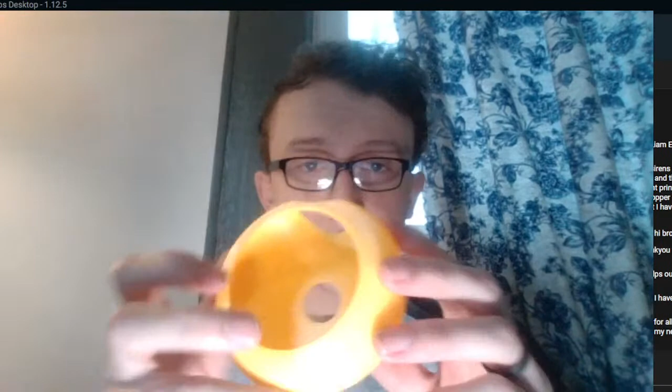So this is that little prototype donut I was talking about, the toroid shape, the torus. That's kind of how it came out. But you can see what I mean when I say there's a lot of printing artifacts, because the printer really doesn't like to print that steep overhang. It can print it, but not very well, as you can see. So that circular little hole looks a bit more ovular than it should have. But other than that, the casing is not bad. This was printed at a 0.15 millimeter layer height. But yeah, that's not bad.

That's not the part with the tube included, because I was thinking I'd print the tube separately. But seeing that I was able to do that relatively well, I think we're going to slice this up real quick and get it ready to go. We're going to slice it the way it is now, start that print, and see how it comes out. But I'm going to go ahead and reassemble this, and we'll see how it looks together.

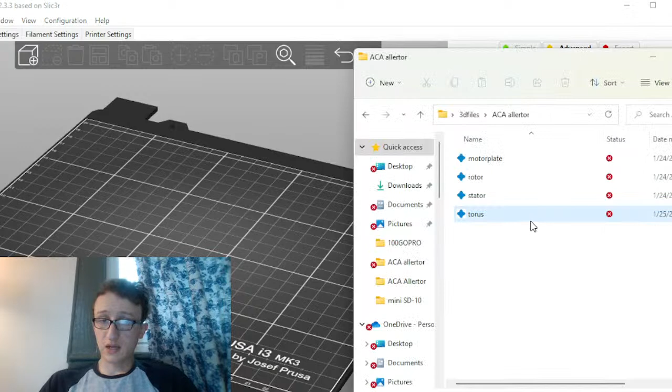Take this, drag that in. This was the one that I had supported, so we're going to support that again. Now I want to make sure this is going to actually be removable support material because I don't want this thing being crazy and not being able to take the thing apart.

So let's look at my contact pattern first, my contact surface. Print settings, support material, raft layers, contact Z distance. That's a little close, let's make that a little further away.

Rectilinear, I don't really care if it's any other shape, so we're good, yeah that's fine. I just want to make sure it was at least detachable. I wish they gave you the option to actually make it a little bit bigger, so I can actually have it a bit further away.

Let's slice that again. Now, granted, this is also 0.15 millimeter layer height, so it makes the whole kind of shroud look a bit smoother. I probably could realistically get away with it being 0.2, but I don't want to test fate here.

I'm just checking right now to make sure this is actually going to print the way I want it to. And that looks pretty good. It's a big void right there. I'm not a big fan of that.

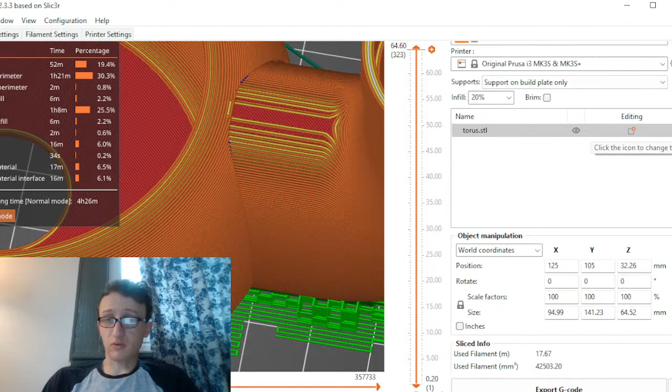Let's transfer this stuff over. Let's see if I did a bit of a higher layer height, let's see if it prints it just a bit faster than that. Some of the detail will be lost, but I don't think many people will really care about that much. About 4 hours and 26 minutes, so it's not that much of a difference.

It's not that much of a difference. Yeah, let's just go ahead and print that. I am completely fine with that. Let's just go with that.

I'm going to rename it from torus because that sounds like I'm talking about some astrological sign. Let's do, I don't know, Shroud? Yeah, let's just call it the Shroud. And we'll save that.

Write that to the card. Take that out, alright. And now we will go pop that in a printer and see what the printer does.

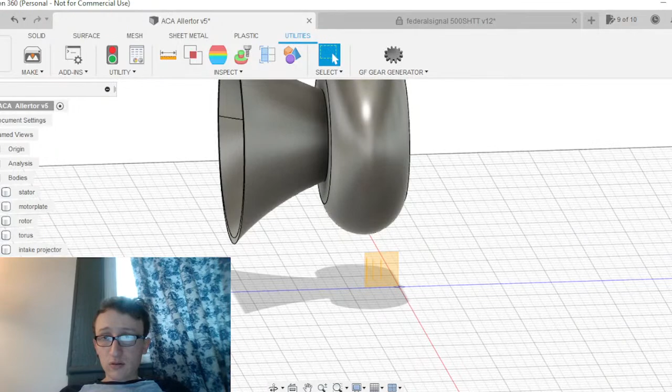So we're going to go ahead and abort that print. That print is just not ready yet. I want to make sure that it's going to actually catch that little flange at the bottom. Sorry, I just took off without you guys, but I wanted to make sure I got that stopped before it kept going and did its own thing. I do want to get that little divot on the bottom, and I don't want that print just going and doing its own thing when it's not necessarily done yet.

So there's that little bastard sitting out down there. That's really going to be the thing that's kind of really annoying to try to print. But I think we can do it. I think we can do that.

So let me see. Let me first see where the rotor and everything is situated, where it sits. Okay, so it's going to be kind of... I think I know how I'm going to do it. So I'm going to come in here. I've already made the torus. I don't want to redesign any of this.

I think what I can do, however, is start printing the intake cones. That's fine, that part I know, it's pretty much done. So let me go in and print this really quick. Well, not print this, but at least get it started.

We'll go in there, we're going to slice this really quick, so I know this is going to be fine too. But I want to make sure that this is all going to be making effective use of my time, or making effective use of print time, really, I should say.

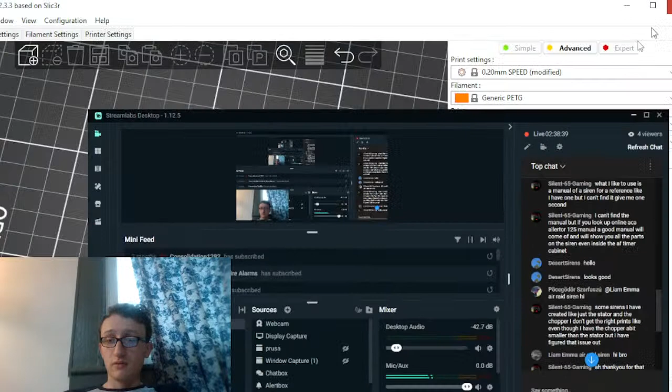Okay. Intake projector, there we go. Drop that in there. I need supports, so we're going to generate some supports. Yeah, it's messy, but like I said, you're not going to be able to see any of that, so it's not that big of a deal.

3 hours and 31 minutes. Wow, that's long. That is a long print. Yeah, that's a bit longer than I was really hoping for it to be.

Oh boy, okay, well let's change the print settings a little bit. Let's see, support material detachable pattern spacing - let's make this pattern spacing a bit wider than that. Let's do like 6. Just so it's a bit further apart. I don't need to have the patterns really densely packed.

Because it can bridge a 6mm gap, it's not that hard. So I think it will be able to bridge that. It should be able to. I hope it does.

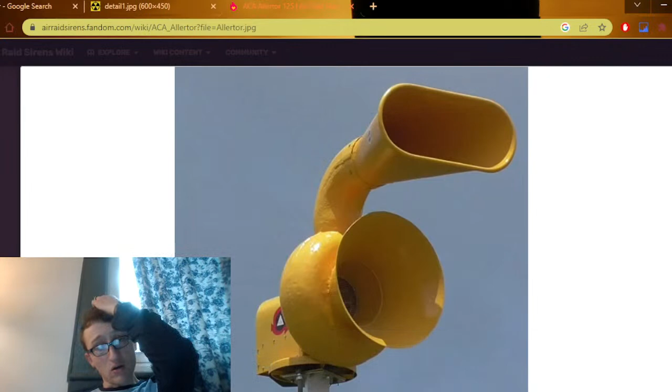Okay, so now I want to make this top projection horn right here. I know it's a bit of a weird shape, but I don't imagine that's going to be that hard to make, because I'm just going to pretty much use the loft tool to do a lot of that work for me.

Keeping that inspiration right there, let's go ahead. Oh, I need to also make that little divot on the bottom of this to actually facilitate having the rotator there, even though I'm probably realistically not going to actually use that section as a rotator. It's pretty much just going to be for display, just so it looks like the proper part of the siren.

But let's go on and try to make this horn. Now, it does sit back kind of forward of... okay, so it's not super far back from the actual front. It sits really, really far forward of the bottom projector, of the intake projector.

But let's try. It's also just such a, I swear, the Allertor is such a goofy looking siren. I think we can all be truthful here when we say that the Allertor is a really goofy looking siren. But it's part of that goofiness that leads to it being so recognizable, because it's such an interesting one.

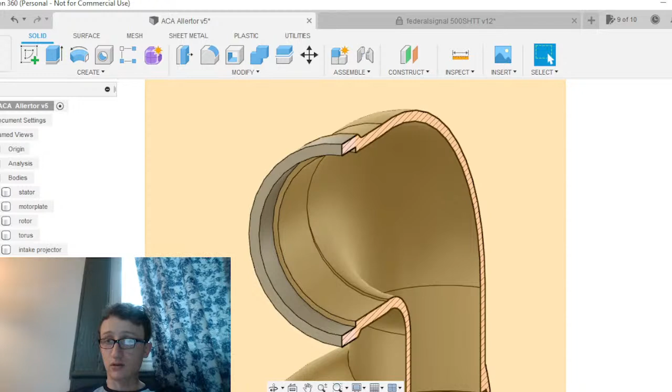Let's go ahead and, I know Klumu is from Canada, so he might be interested in seeing some CLM stuff eventually. That'd be kind of fun to do.

I mean, the CLM, at least the rotating CLMs, the Canadian Line Materials, is also another odd looking siren too. I personally think out of the Canadian sirens, probably my favorite is the CLM omnidirectional siren, because I think that one's really cool.

I actually don't need that offset plane. But yeah, I think the omnidirectional CLM is really, really cool. I like that more than I like the rotating one.

I'm just making this little kind of tapered section first. So how far away is that? Can you give me dimensions, please? Thank you.

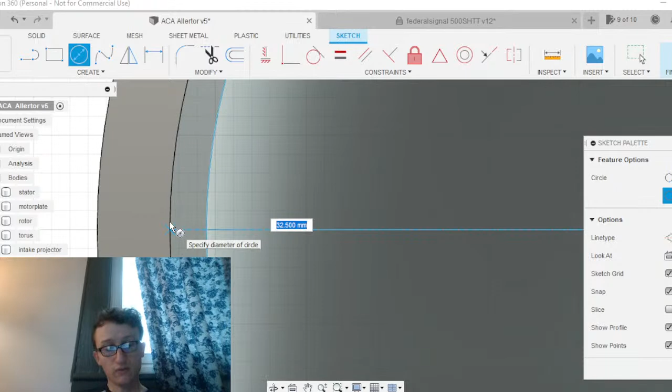32.5, so 32 and a half. Let's do 32 and a half... let's do 30... let's just do 32... let's do 32.2. That gives me some level of tolerance, but it should still be generally tight enough to fit the tube in there.

So now we'll bring this part forward, just a little bit. We're not going to join this. I don't know why Fusion loves to just assume you want to join things together every single time. We're going to make sure this says new body, because we're going to join it to something else.

So now we have that. So this little ring is essentially what the top projector is actually going to grab onto. That's the section that actually slides into this flared, not flared section of this, essentially this flange. So we're going to do that.

Now I need to put a construction plane that's coming off of this that goes about as far out as the projector on the real one goes, which is going to be real goofy.

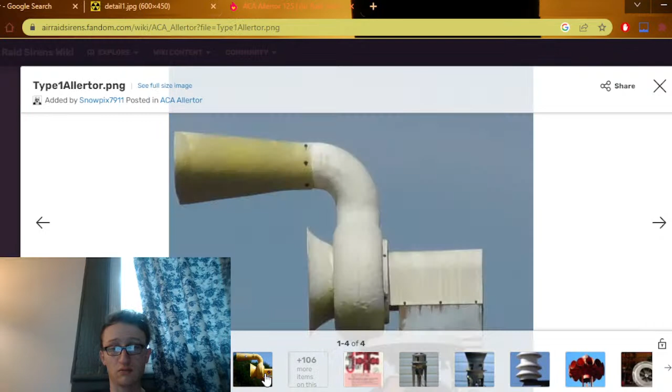But I guess it doesn't matter, ultimately. Most of them are still up.

I'm glad I didn't start printing this yet, because I might have to actually bring this tube up a little bit, because it's a little close.

Let's see if we can find a picture of an Allertor from the front. Nope, two L's, I always forget that. There we go, that's a pretty good one.

It's up a little higher than what I have it, not by much, but by a noticeable degree at least.

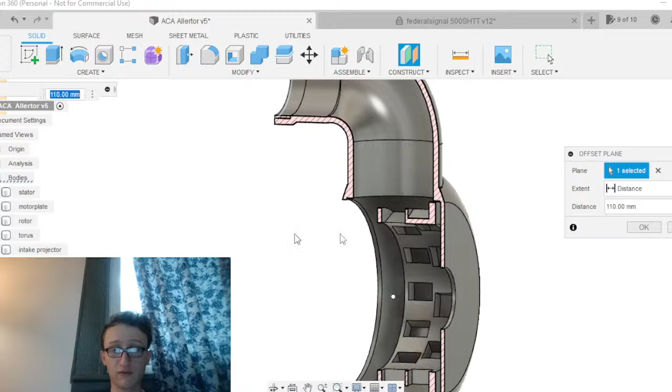So in order for this to look better, I would have to actually extend this pipe up a little bit. This is one of the most annoying things about making model sirens, having to just barely fine tune it to get it to look just right.

It really does not want to... oh, that's why. Let me cancel all that. Stator, motor plate, rotor. Okay, there we go.

I might actually have to split this in half again. So let me inspect section analysis, let me split it from there. There we go. Yeah, I knew I was going to have to split it from a different angle.

So let's go ahead and come in here, sketch. We're going to sketch another circle just to cut this tube back out again, because I need to get in between this tube and the actual donut to give me some more space.

So let's cut this ring out of it, which will separate the two pieces now, so now they're their own separate entities again. So cut. Alright, so now there should be an extra body, because now that this tube is actually separate from this, independent from this now.

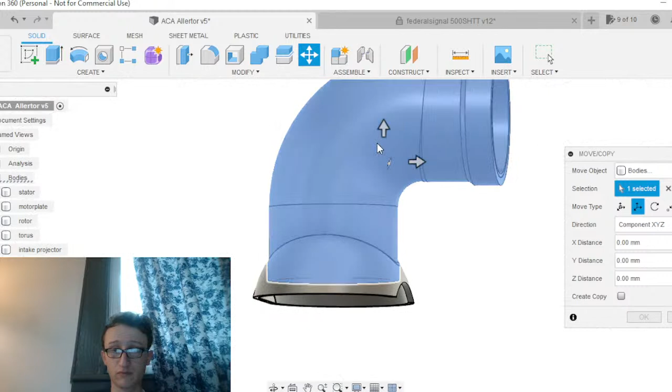Let's bring back the other analysis. I think it was... which one was it? Was it this one? No. No, there we go. Okay.

Yeah, I am very glad I didn't just start printing away. So I need this to come up just a little bit. Even 5 mils seems a bit big, but...

Now we have this stupid little shape. Well...